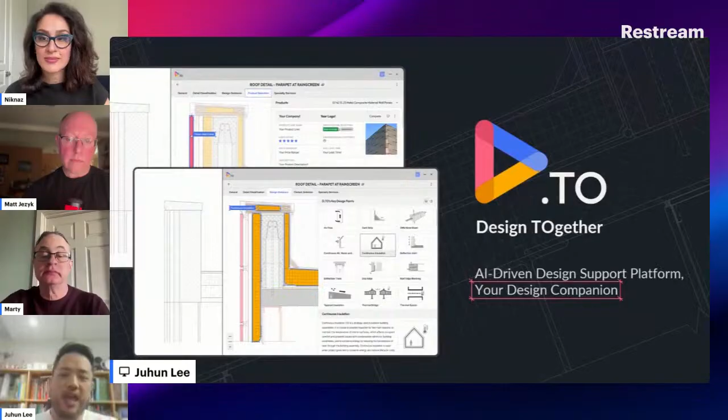So let me introduce who we are and what we do, especially related to automating our workflow. So D.TO stands for Design Together, where we are developing an AI-driven design support platform for architects. As our name suggests, our main goal is to become a design companion to empower architects' daily practice, especially focusing on areas where we believe the industry struggles the most.

First of all, our team is all from the AEC industry. Not just the four founding core team, but almost all members are either architects or architectural designers, or software people with AEC software development experience. We believe this is very beneficial for us to identify real pain points within architects' daily practice and provide practical solutions to empower architects themselves. So with that, our goal is to provide a very useful tool rather than a fancy technology that just follows the trend.

So diving into the topic, automation of our workflow, we believe that there are two distinctive automation types. We call them divergence and convergence. Divergence could mean exploring possible variations from a set of parameters. In the early design stage, we want to quickly evaluate multiple design options with a given set of design parameters. The main examples are computational parametric design and generative AI, which can really improve the pre-schematic design phase. And obviously, there are many great tools in the market we all enjoy.

For example, we can help you choose the best design approach from many possible options, then help you find the most relevant design reference for that approach, then assist you to come up with the best solution for the design approach you chose earlier. Of course, we can always add more layers to this concept, but the main idea is that as a design project moves forward, at a certain point we all need to make decisions to complete the project.

So as I mentioned, during pre and schematic design phases, the divergent automation approach is very powerful because, as we all know, you need to explore many different options. But once you have a great schematic design set, during the DD and CD phases, convergent automation can play a big role in resolving all those complex construction detailing processes. So we believe this is the crucial aspect of a design project, and that's the area D.TO is focusing on automating.

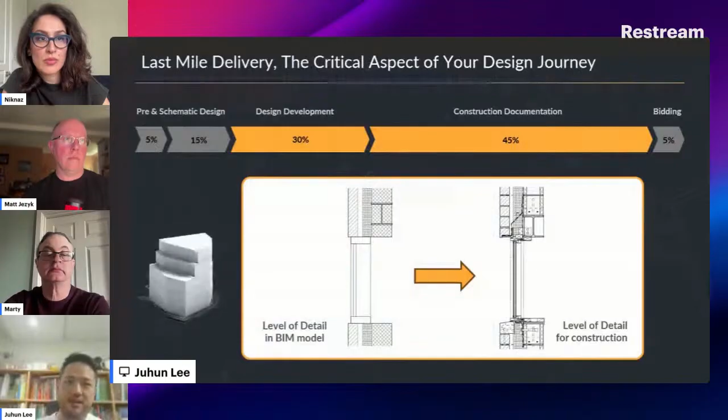So the first step is a curation of design guidance and solutions. At a callout detail view level, our agent identifies the design problem. In this case, on the left side, it is a parapet condition with rain screen, CMU backup, and membrane roofing. It then provides a curated list of design references the designer must consider to properly complete this specific design problem, and also provides a high-quality detailed solution architects can utilize to jumpstart their detailing workflow.

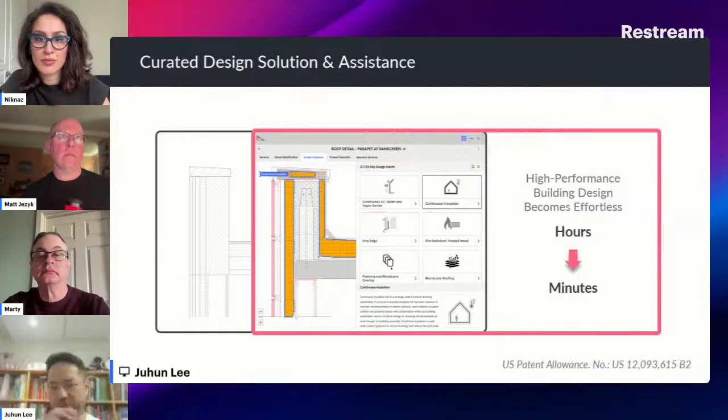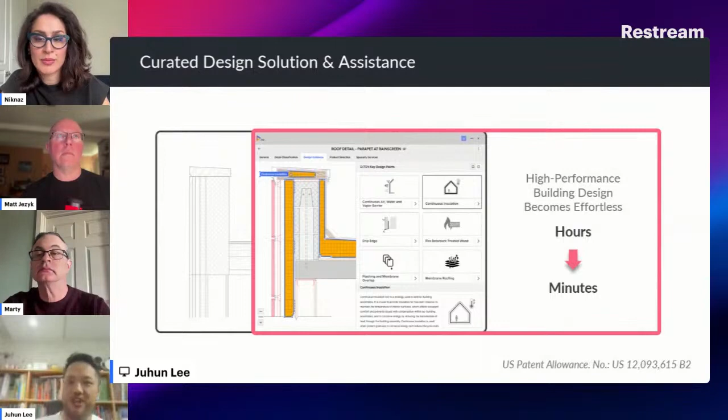Here, what we would like to achieve with convergent automation is to cut down all the unnecessary time and effort spent searching for useful design references, energy code guidelines, building science background knowledge, and other things. Basically, all the information you need to complete this design. It is very hard to show with an image, but our detailed solution in the middle is actually a vector-based interactive diagram where you can hover, zoom in, zoom out, and click to further narrow down the information displayed on the right panel. For example, if you click on the insulation part, D.TO will show only insulation and thermal related design guidance. So another layer of convergent automation.

And we can expand this to a building plan or section scale. What we do here is that our agent automatically analyzes a wall section or floor plan and populates callout views, in Revit in this case, at locations where you need to resolve details. So again, this is convergent automation narrowing down the design scope you need to tackle.

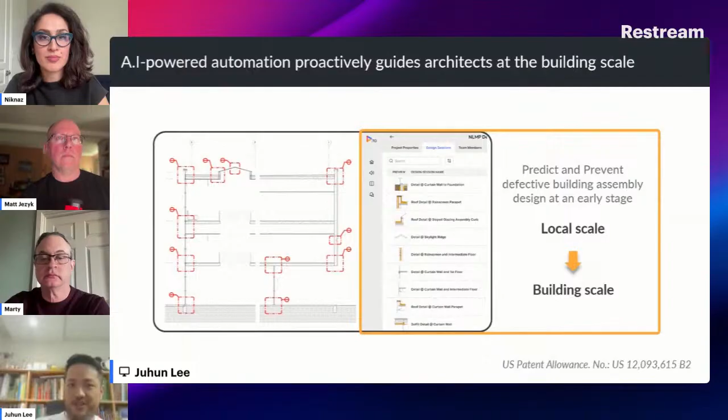Product search also can benefit from convergent automation. There are many products you can search online, and there are many great web platforms for searching products. But here, D.TO utilizes the interactive design diagram again to make product search super easy. For example, if you want to explore rain screen products, you simply click a rain screen element in our diagram while you're working on this detail. Then our agent will deliver only relevant product information right in front of you.

Of course, it uses other parameters as well, such as project location, design condition, like roof parapet for this case, climate zone, etc., to further curate which products are most relevant. So these are a few features where we're really trying to bring the convergent automation approach.

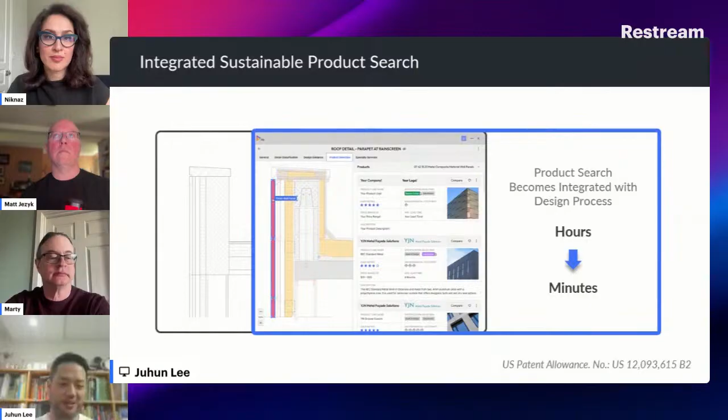Now, I'd also like to show our vision, the true AI vision from D.TO. We are developing an AI companion that can read and understand drawings and design workflows, then interact with you in real time to support every step of your construction detailing process. This will include all previous features. So it will give you summarized design references, design solutions, and even bring BIM components that you will need for your drafting task or Revit view, for example, so that you can just import and kickstart your detailing process.

And also think of it as having a senior architect next to you, someone who can flag potential issues in real time and guide you toward stronger design outcomes. So our goal is not just a tool; rather, it's more like a virtual design mentor built to grow alongside your daily practice.

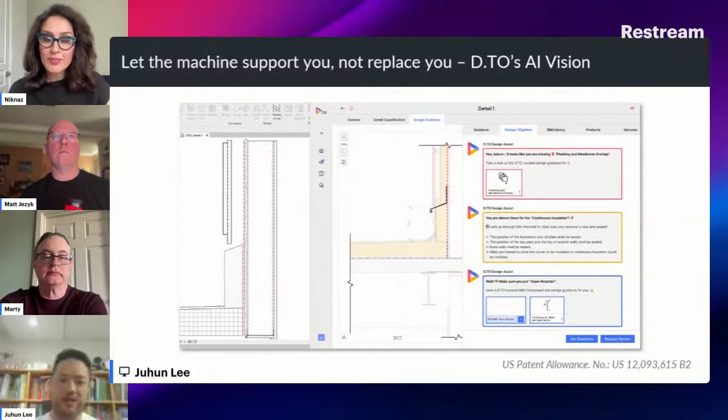Now, I want to close with a real-world pilot result. One of our customers did pilot testing with and without D.TO. Two junior architects got a task for an insulated wall panel and roof detail. The result was quite dramatic. They basically showed about 85% time savings for one detailed drawing production. So they're happy, and we are also happy.